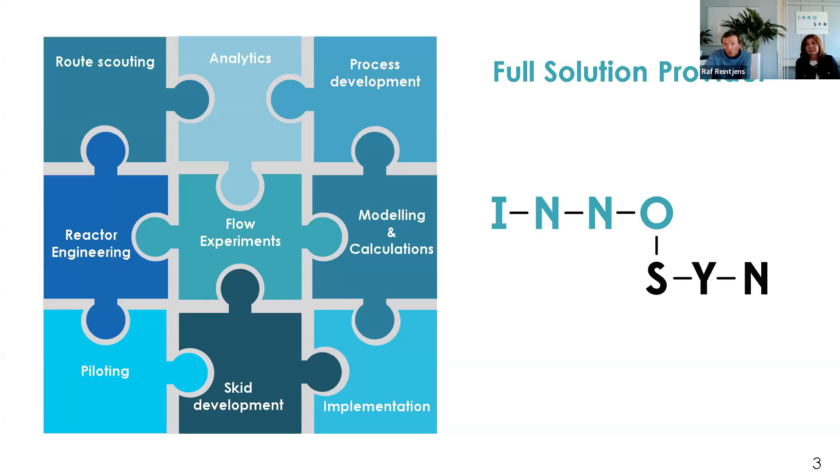Now, coming to the subject, ester reduction with DIBAL. Typically, you see these kinds of conversions being done in the fine chemical industry in a batch reactor. Now, the batch reactor is a very versatile type of equipment, but it also has a list of very familiar limitations, which you all know, of course. But I want to highlight the most important one, and that will be the limited cooling capacity. And that makes it extremely difficult to maintain temperature control during this reduction.

And typically in batch mode, this is done by slower dosing of your reagent, the DIBAL-H. So not the intrinsic kinetics determine the productivity of your system, but the dosing rate is telling you how fast you can produce. And this has to be slower than the cooling capacity of your reactor. Now, how can we better tackle that problem and gain high productivity?

Best thing so far is to switch from batch mode to a continuous mode. And there we have, of course, different reactor systems at hand. The most simple one would be a continuous stirred tank reactor. But in that case, we lose control over the time component. CSTRs have a very broad residence time distribution, and this is not what you would like. So moving down and gaining more control over time, we end up with tubular reactors as the ideal reactors for such a fast exothermic reaction.

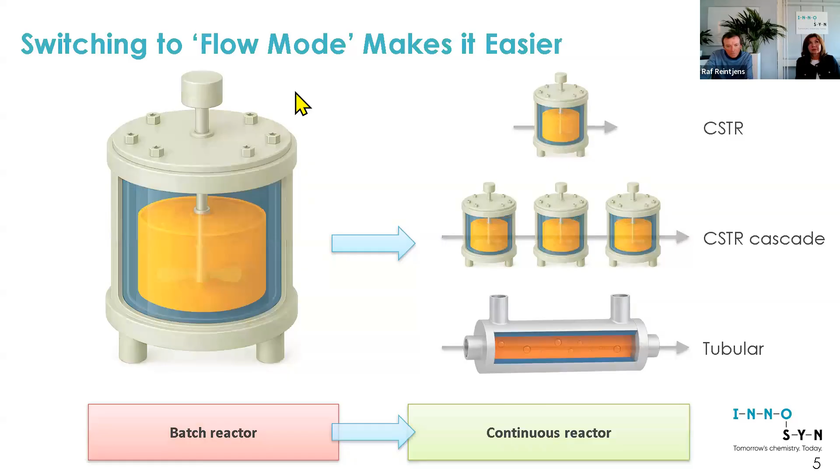Now, tubular reactors, and especially tubular flow reactors as we have designed, possess very advanced capabilities, which enable us to do these instant chemistries. And that comes from the fact that these tubular flow reactors with millimeter-sized channels provide us with enormous heating and cooling capacity and instant mixing. And that enables us to handle chemistries that produce unstable intermediates.

Next to that, these small-sized channels, we are talking 1 to 4 millimeter channel sizes with just 0.5 millimeter of wall thickness. Nevertheless the wall is very thin, they are extremely pressure resistant, which means that also high pressure reactions, high pressure process conditions can be handled. So, for instance, low boiling solvents can be handled at very high temperatures, way above the atmospheric boiling point of your solvent.

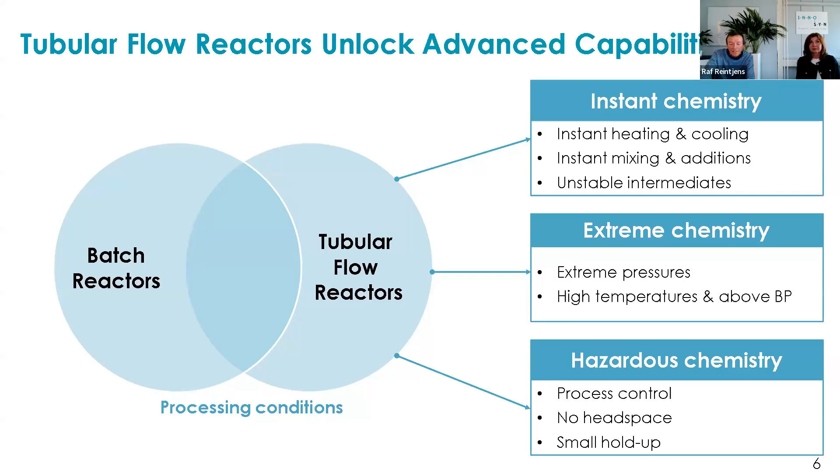And finally, the increased heating and cooling capacity gives you process control over the main parameters that are important. These channels will be fully filled, so there is no headspace available, and the high productivity will translate in a low processing volume, which in hazardous chemistry is, of course, essential when you are handling dangerous goods.

Here you have a number of examples of 3D printed flow reactors, small ones for the lab and larger ones for piloting. At InnoSyn, we opted for a modular design concept, modular in the sense that we will have different functionalities and different volumes and sizes, so that we can apply these modules and reconfigure them easily in the required reactor setups that we need in our lab and in our piloting investigations. And of course, later when such a reactor system needs to be scaled to your plant situation, then you get a dedicated designed and manufactured reactor.

Now, to be able to create all these excellent capabilities, we need to vary the configuration, the geometry of the channel, the size of the channel, so diameter and length, and shape of the channel. And for that, it was advantageous to use 3D metal printing as a new manufacturing technology, because 3D metal printing allows us to apply that design freedom that we require for that high performance.

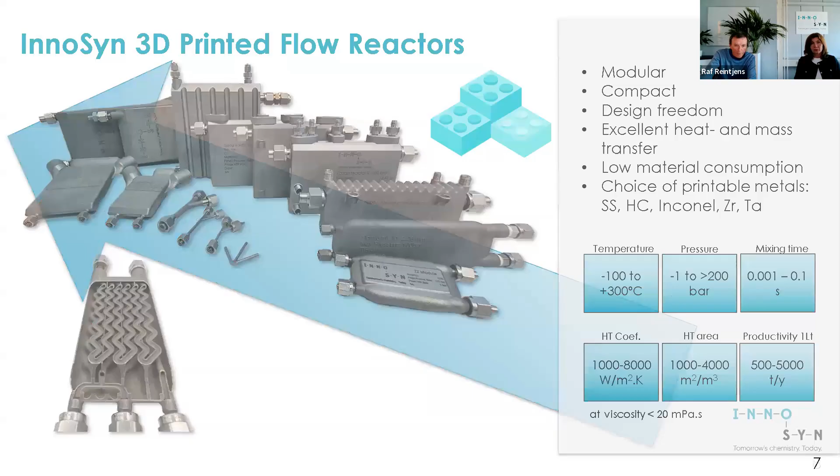Now, where does this high volumetric heat transfer capability come from? The volumetric heat transfer capability is calculated from the overall heat transfer coefficient in watts per square meter Kelvin, multiplied by the volumetric heat transfer area in square meters per cubic meter of reactor volume. Now, we investigated these parameters, and we started with, of course, the heat transfer coefficient, to get that a little bit higher, to improve it from the batch situation.

And therefore, we designed temperature and heat transfer flow cells to measure it. So in the bottom part here, you see my mouse, you see such a typical heat transfer flow cell. Here we have heat transfer fluid flowing through the main tube, and we have a part of reactor channel, in this case a zigzag channel of 1.13 millimeters diameter. We have the possibility to flow a certain processing fluid through that zigzag channel, while we can insert temperature probes at the beginning and at the end of this section.

So we can measure heat transfer coefficients over a short section, and then vary the turbulence at the processing side, while we also are able to vary the turbulence at the heat transfer side. And the wall thickness is, of course, in all these measurements the same. But since that is only 0.5 millimeter of metal, the high conductivity of metal results in a situation where this wall is not posing any resistance to heat transfer. Now, please give your attention to this graph here. On the vertical axis, we have the heat transfer coefficient on the processing side.

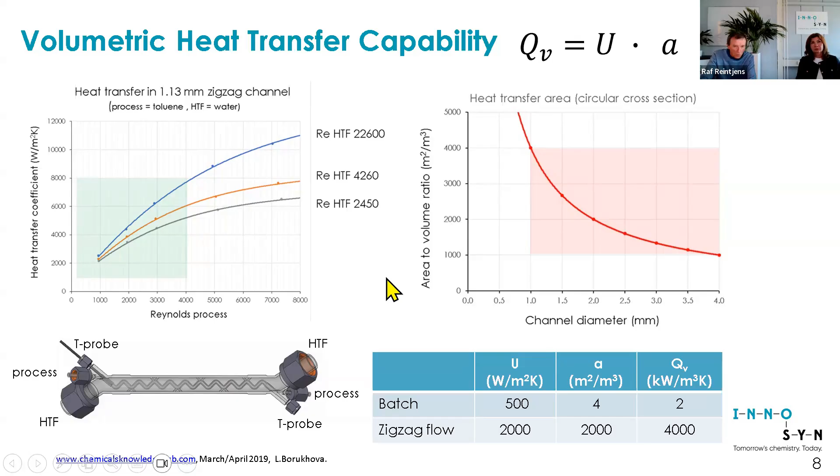Having a high heat transfer is one thing, but how to be sure and how to monitor that? Here comes a second feature stemming from the design freedom of our 3D metal printing. Although the channels have only a few millimeters in diameter, we are able to design our modules in such a way that we can insert small diameter temperature probes. You can see that here, that blue line is a small diameter temperature probe of between 1.5 and 0.5 millimeter, inserting directly into that channel. And we can have multiple of these inlets for probes in a lab scale reactor.

Here you see the scheme of that reactor. There's a process inlet and a process outlet, and while the fluids are flowing through or reacting, we can measure the actual temperature profile. And these larger inlets are there to allow the heat transfer fluid to flow through, and to achieve high Reynolds number, we have to have more space. So these channels are much wider than the reaction channel and have higher flow rates.

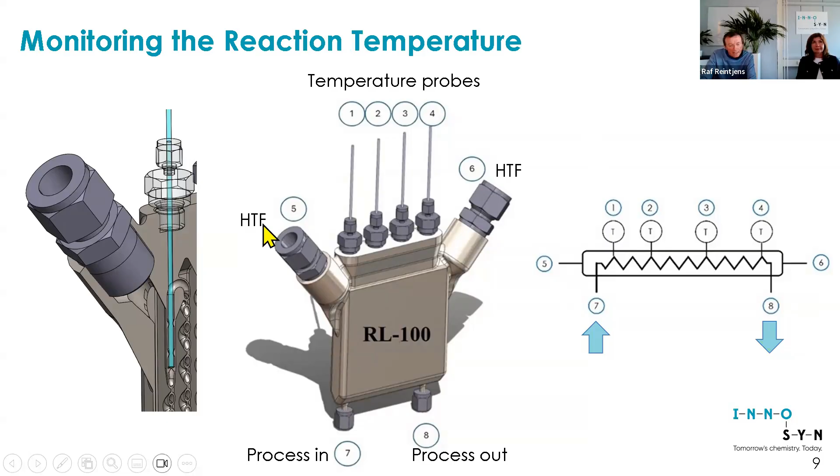Providing these high heat transfer capabilities is something that we tailor at lab scale. So the reactor design is tailored to the needs of your chemistry, meaning that the channel performance is optimized in the lab. Geometry, size, volume, residence time, all these aspects need to be optimized in the lab together with the processing conditions.

And then to allow a robust scale-up, we rather keep these parameters, size and geometry, the same, or at least close to that value, so that the actual increase of production capacity is coming from the fact that we pack multiple of these channels in parallel in a single reactor module. And if that doesn't provide the required production capacity, we can have multiple of these modules again in parallel, but then externally, to gain in capacity to your desired target capacity.

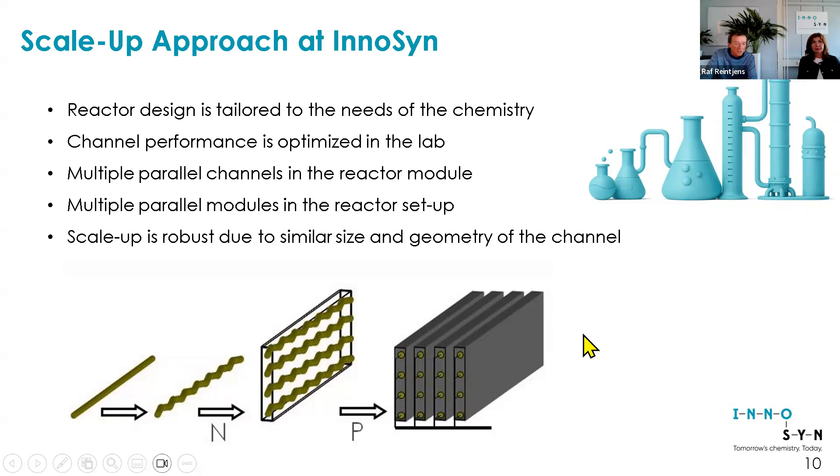So we are able to manufacture real plant scale flow reactors, but there is a second aspect to reckon with. When plant scale commercial flow reactors are to be used in a plant, they have to comply with legislation. The first thing that you then encounter is that we have to comply with the Pressure Equipment Directive put forward by the EU. And this tells us that when the volume of the reactor setup, the design pressure, the design temperature is above a certain value, you need to certify that your reactor is safe to be used.

This is a procedure which is well known for batch and large scale reactors, but for 3D metal printing as a new manufacturing technology and flow reactor as a new reactor system, this was not previously known or done or demonstrated. And I can tell here that we have done recently some customer projects where we provided commercial flow reactors, and together with a notified body and our 3D metal printing service provider, we went through the whole procedure to acquire that certification. And this typically means that you have to demonstrate to the notified body that your printing parameters are qualified to do so.

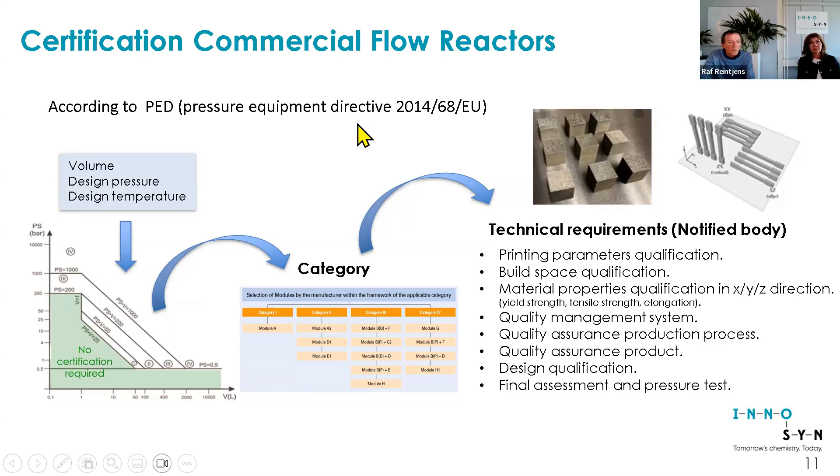And furthermore, the printing service provider, the company itself, has to show that their quality management system is of a certain level. Quality assurance of that production process has to be there. The product itself has to be looked at, meaning that you have to have a qualified design. And finally, we have to show that in a hydrostatic pressure test, we can meet all the requirements. Now, Innosyn proudly can announce that we have done this and we are able to provide it to you whenever you would require a commercial flow reactor from us.

Now, sorry for this a little bit long introduction. We can now move on to our actual case study, the reduction of an ester to an aldehyde with DIBAL-H. This reduction of ester is typically done in a two-step approach to avoid selectivity issues, meaning that you reduce the ester first to the alcohol and then oxidize again to the aldehyde. Now that is a laborious route, and therefore industry rather uses DIBAL as a reagent, because DIBAL allows you to partially reduce the ester to exactly the aldehyde that you need.

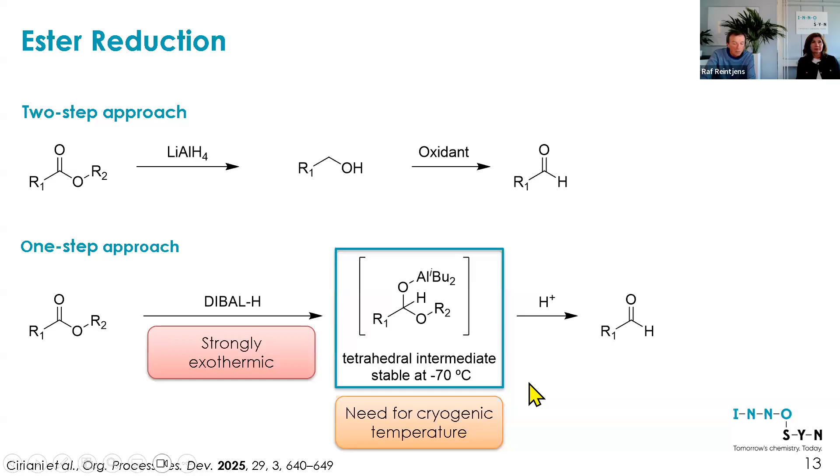The only downside of this is that this reduction is strongly exothermic. It's about -200 to -250 kilojoules per mole. And it goes through a tetrahedral intermediate, which is only stable at very low temperatures, say -70 degrees Celsius. When the conversion of the ester to the intermediate is completed, then you can quench the whole system with protons coming from either methanol or an aqueous acidic quench, and then the aldehyde is released. But during that whole process of DIBAL dosing, there is need for this cryogenic temperature to keep the tetrahedral intermediate stable.

Now, why is that so important? Here again, you see the mechanism depicted. The ester forms together with the DIBAL a tetrahedral intermediate, which is unstable. And it is very important that this intermediate doesn't degrade and release aldehyde prematurely. While you are conducting this DIBAL dosing and this conversion to the intermediate, any formed aldehyde would immediately yield loss of selectivity due to overreduction and alcohol formation. Here you see that depicted in the second part of the mechanism. The aldehyde, just like the ester, would also form an intermediate which after quench would be transformed to alcohol. So it's very important that we keep that tetrahedral intermediate very stable.

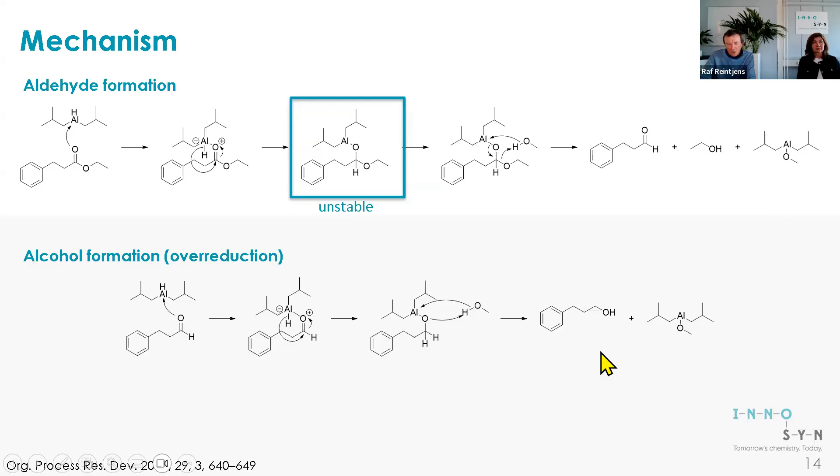Now, this then poses problems when using batch reactors for this conversion. Batch reactors have a limited cooling capacity. In the lab, there is still quite some area to volume present. But when we scale it up from, say, a 100 milliliter reactor to a 100 liter reactor, this area to volume ratio declines strongly. This will lead to further decline of cooling capacity, and means that the dosing of the DIBAL has to be even slower than it was in the lab to maintain the cryogenic conditions. And during all the dosing time, your tetrahedral intermediate needs to be kept stable. That reduces the DIBAL dosing flow to maintain temperature control, and low dosing flow immediately translates into long exposure of that unstable intermediate.

We apologize. We had a small technical issue. We lost our connection. So we're back on track, and Raf will continue.

Okay. So here are a few lab scale examples of batch reductions with DIBAL. And you can see that they kept temperatures at -78 degrees Celsius and had dosing times of half an hour to 1 hour to get all the reaction heat out while maintaining that temperature.

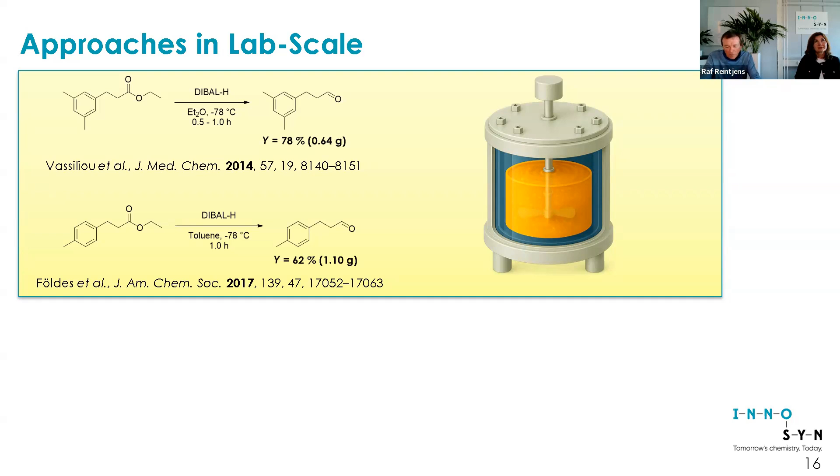Now, selectivities are not that great; you lose a lot of yield towards alcohol formation. And the way to improve that, of course, as we pointed out earlier, is to switch to continuous mode.

And here is an example of lab scale DIBAL reduction in a small flow reactor. You can immediately see that the 1 hour dosing time that the batch reactor had is reduced to even less than 1 second here in this example from MIT in 2012. The yield is 96%. There was almost no alcohol formation, but that stems from the fact that the conversion was not complete. The example had about 96% conversion.

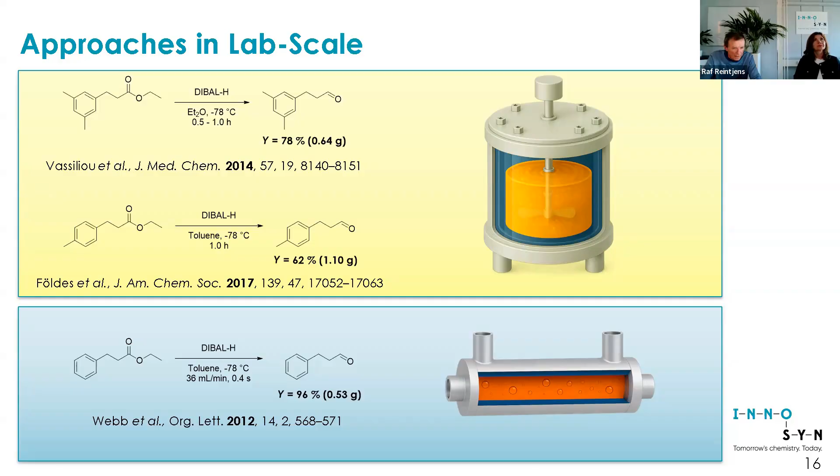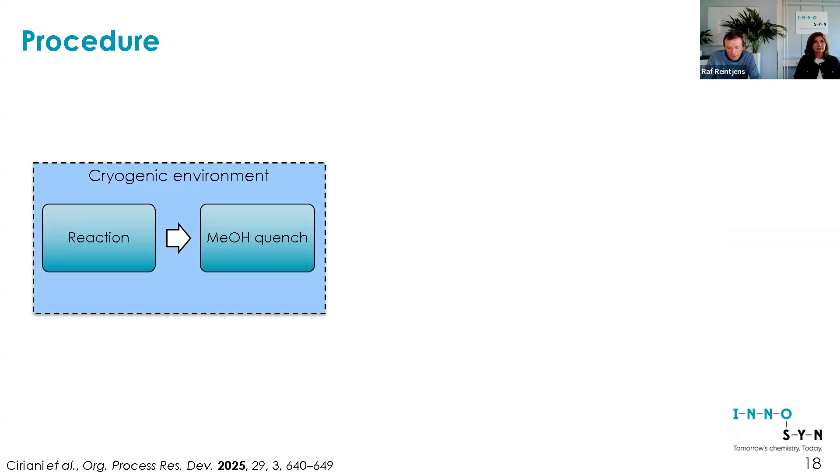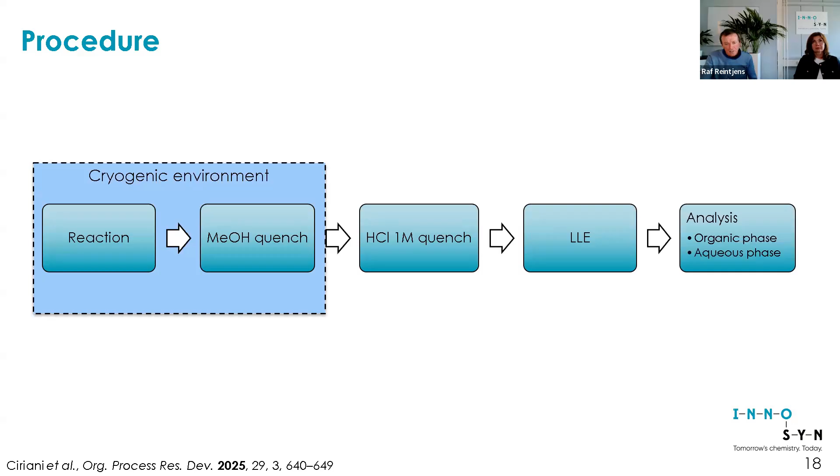Now, let's move on to our lab scale investigations. Here we have the procedure that we followed. The DIBAL reduction and the methanol quench are, of course, executed in a cryogenic environment at low temperature, then followed by an aqueous quench with acid, a liquid-liquid extraction to separate the product and catch it in the organic phase, and finally, full analysis of both the organic phase and the aqueous phase.

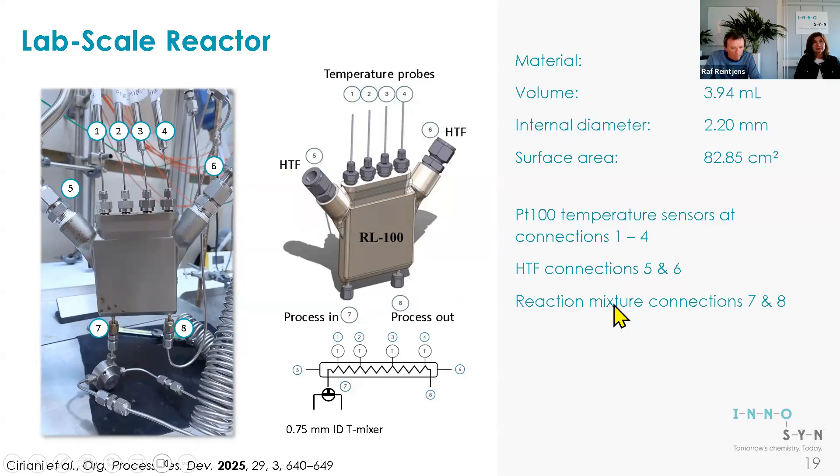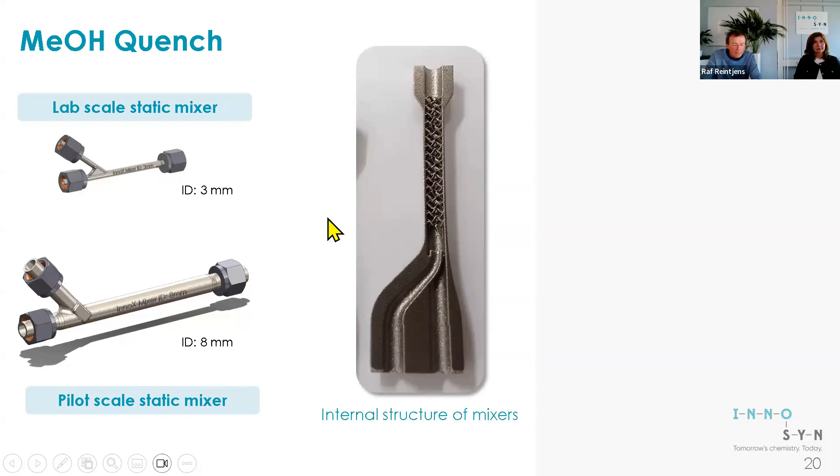After this production of the tetrahedral intermediate follows the methanol quench, and on lab scale we used a static mixer for that with a small diameter, only 3 millimeters. Pilot scale used a bigger one of 8 millimeters, and 3D metal printing comes to aid here, because the internal structures of such a mixer have to be very intricate, and that is only possible with 3D metal printing in a 3 millimeter channel.

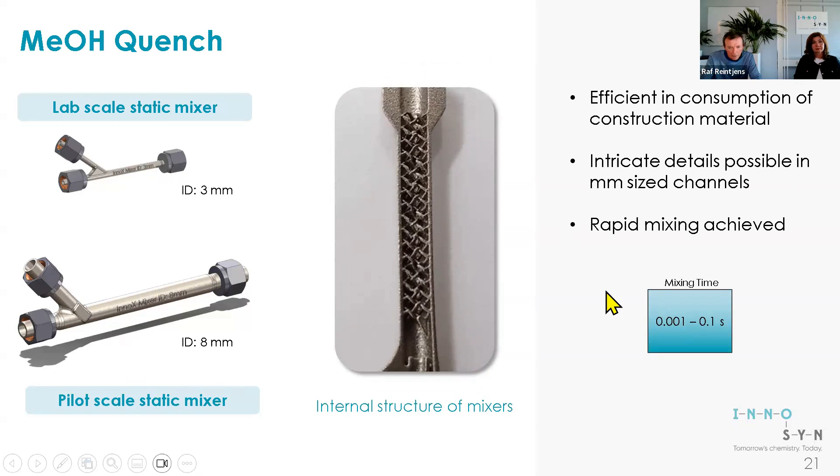Here we have the full setup that we used in the lab as a process flow diagram. Of course, it looks very complicated. I will try to explain a bit more what we see here. First of all, there are a number of gear pumps required for all the reagent flows that we need. Gear pumps are chosen because they have very pulsation-free flow. And to measure that, we applied mass flow controllers. These mass flow controllers directly set the flow rates for these gear pumps. So there is a flow control system for every reagent flow that is required.

Then there is extensive use of cryostats. We had to use 3 cryostats in the lab because there was a large amount of heat to be removed. First of all, the pre-cooling of the reagent flows to a very low temperature. Then, of course, in the reactive system, we have the reactive heat that needs to be removed.

Now, we used in our experimentation 25 mass% DIBAL in toluene, which we could dilute further to the required concentrations by adding dry toluene at this mixing point, after which the desired concentration would flow towards the reactor. On the bottom side, you have the dosing system for the ester and the methanol for the methanol quench. Again, the pumps and the flow control systems, and the mixing of the ester and the DIBAL happens at the reactor site. Methanol is then added at the static mixer just after the reactor.

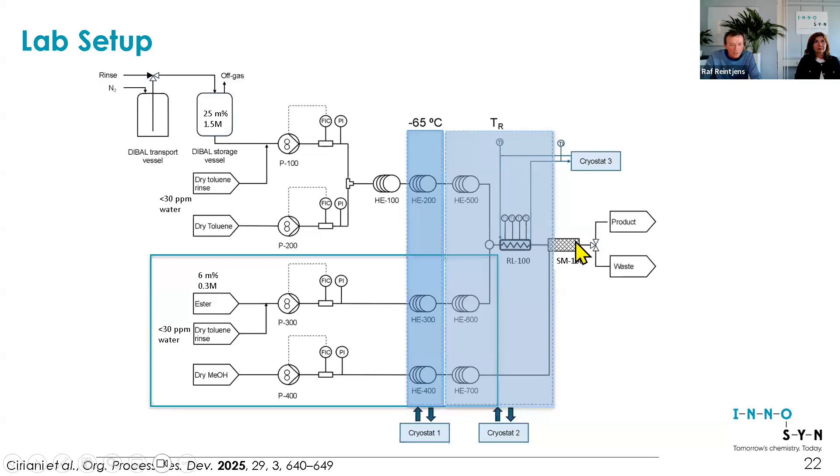Okay. What were our results? We were able to vary residence times in the range of 1.2 to 1.9 seconds, the DIBAL equivalents in the range of 1.1 to 1.4. You need a small excess of DIBAL, but you don't want too large an excess, otherwise you risk over-reduction in the methanol quench. Temperatures were varied from -40 to -55 degrees Celsius, a little bit higher than in the lab publications. And with that, we achieved partial reduction of the ethyl hydrocinnamate substrate.

Production capacity ranged from 0.16 to 0.22 kilos per hour, which is already quite significant if you imagine that the reactor has only 4 milliliters of volume. Now here are the results: temperature, residence time, DIBAL equivalents. We saw no clogging anywhere during this experimentation, which could occur when you have some moisture in the system and the DIBAL produces alumina salts. So dry operation was secured and provided us with no clogging.

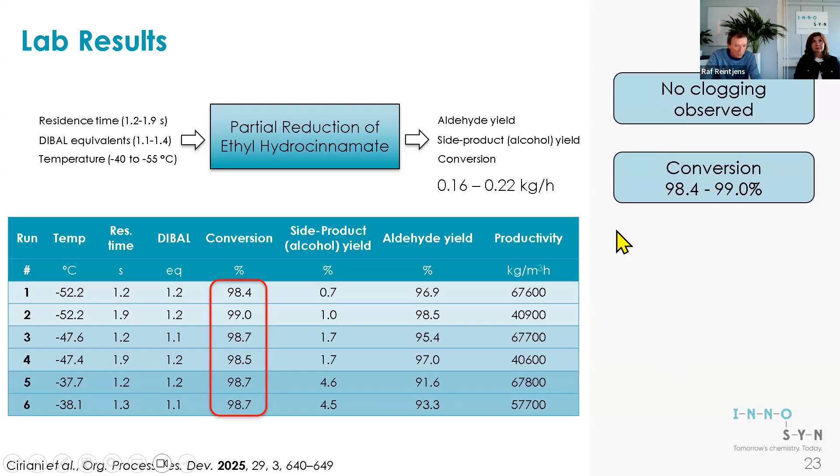Conversion was very high, in the range of 98 to 99%. So only a very small amount of ester was left after the DIBAL addition. Then when we look at the

selectivity that we could achieve, the alcohol formation that we have witnessed, we saw that the temperature of the reactor is a key parameter. At the very low temperatures of -52 degrees, we achieved little alcohol yield, and the higher the temperature was, the more of this alcohol over-reduction was visible. And of course, that directly is related to the stability of that intermediate.

Best results were then achieved at the lowest temperature, -52, and a significant yield of, say, on average 97%, with just 1% of alcohol over-reduction was our final result. Now,

when we look to the data that we measured, we see here the temperature profiles that we determined while we were running this synthesis. You have to imagine the reactor is at a steady state, so at the various positions of these temperature probes, you will find steady measurement of temperature. The inlet temperature is depicted on the vertical axis, -52, here it is 47, and here it is 38. So what can we see here?

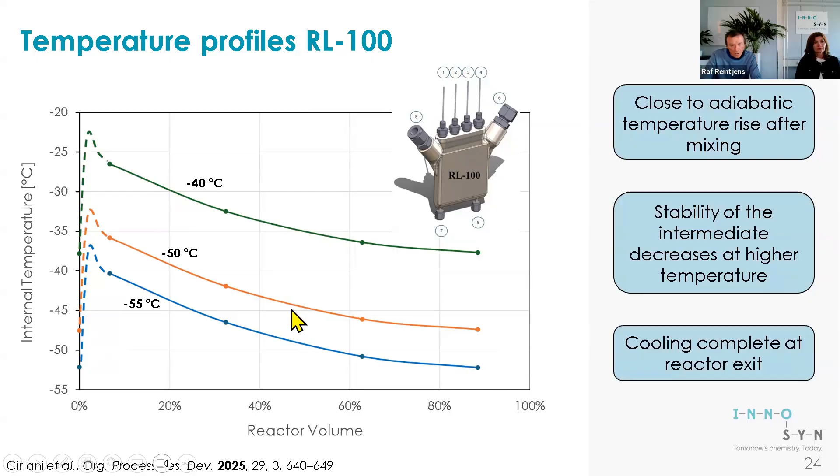There is a box, cold box we call it, around the individual heat exchangers and reactors. I will show that in the next slide. The box itself is flushed with dry nitrogen to avoid any condensation of moisture or ice on your reactor module, so that you still are able to quickly change to other modules if necessary. The samples that we produced are, of course, far bigger than we did on lab scale. Here we have about 1 liter bottles of sample.

The pilot setup, the process flow diagram, looks quite similar to what we had in the lab, but is of course of a much larger size. In this case, we applied stainless steel reactor and heat exchanger modules; there is no corrosion issue, but these modules were better available at that moment, and the heat conductivity of stainless steel and Hastelloy are practically identical. They deviate a little, but the heat conductivity of the wall doesn't pose any limitation to the heat transfer capability.

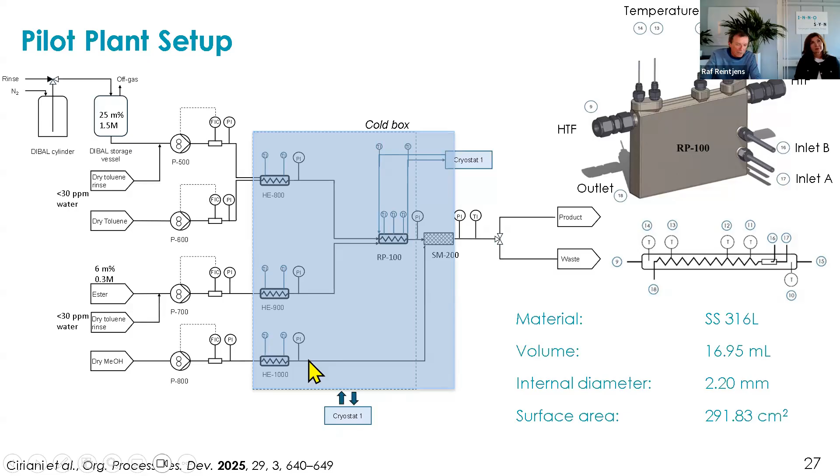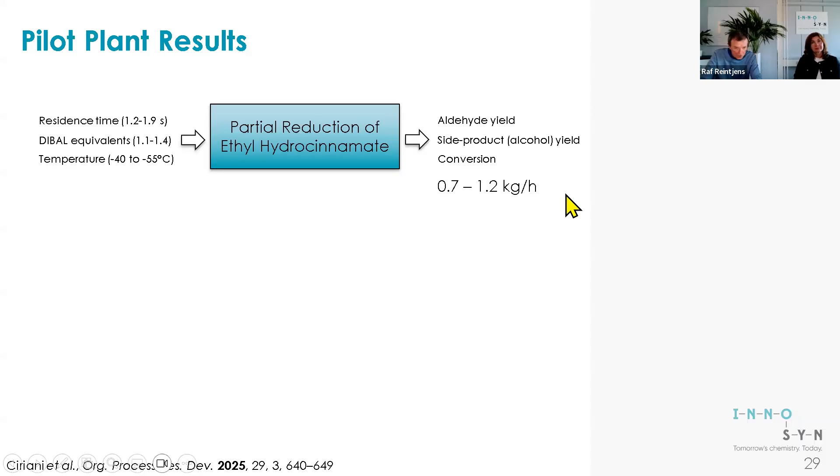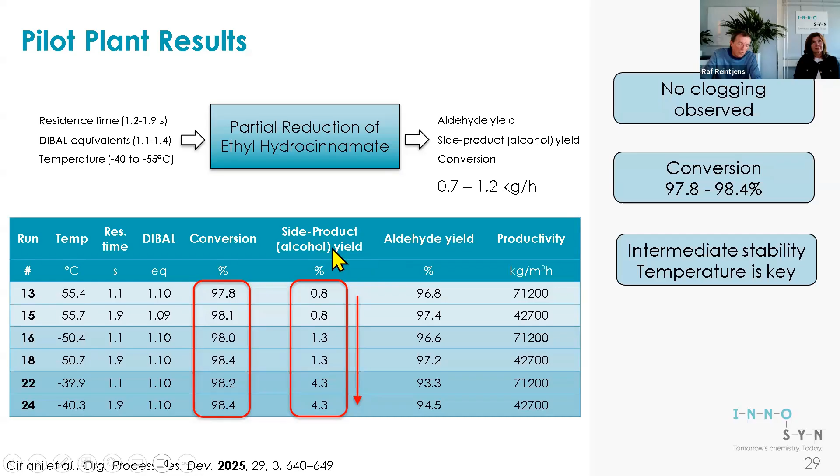Again, we applied similar ranges of variations in residence time, DIBAL equivalents, and temperature. We achieved a way higher production capacity, and these are our results. Again, there was no clogging observed. High conversions achieved, about 98% conversion, a little lower than what we had in the lab, but we could duplicate the side product formation, the alcohol over-reduction formation, quite nicely.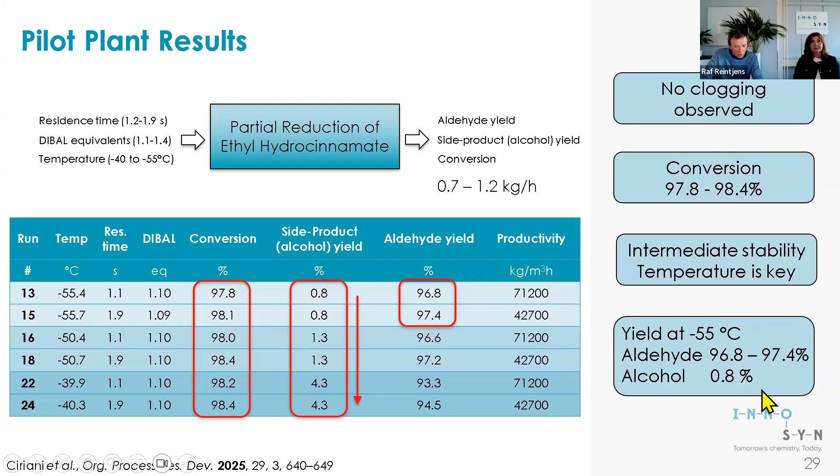As you can see, at lower temperatures, we had less than 1%, 0.8% of alcohol, and the higher the reaction temperature goes, the more alcohol is produced. Again, directly translated and correlated to the stability of that tetrahedral intermediate. The best result that we could achieve was at the lowest temperature of -55. And the yield in aldehyde, 97%, and alcohol fits nicely with the lab results.

Again, also in the pilot reactor, we have these temperature probes. In this example, we had a reactor with only 3 temperature probe inserts, but the picture really resembles what we had in the lab. A fast exotherm and adiabatic temperature jump in the beginning, and then a similar cooling curve as in the lab.

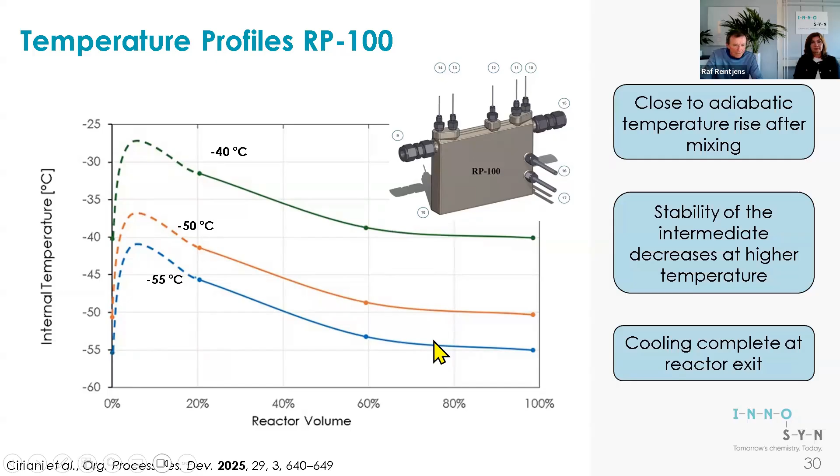This high temperature, adiabatic temperature jump in the beginning, is actually posing a problem. It exposes our tetrahedral intermediate to a much higher temperature, and that causes this 0.8% of alcohol over-reduction. And we think that a single injection point, as we applied it here, is hampering us.

We expect that multiple DIBAL injections, so multiple dosing points, would be an improvement. Because after every dosing point, it's possible to cool back to the original temperature. And by spreading the release of the total reaction heat over multiple points, we guess that we can achieve, on average, a lower temperature and therefore a better result in the alcohol over-reduction.

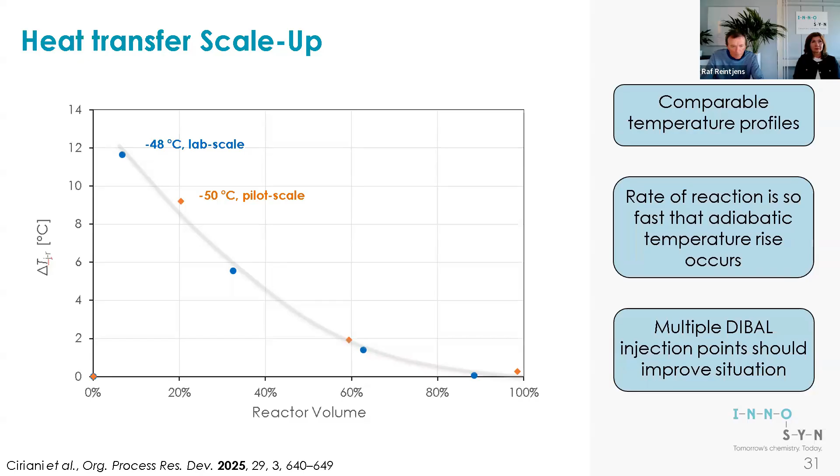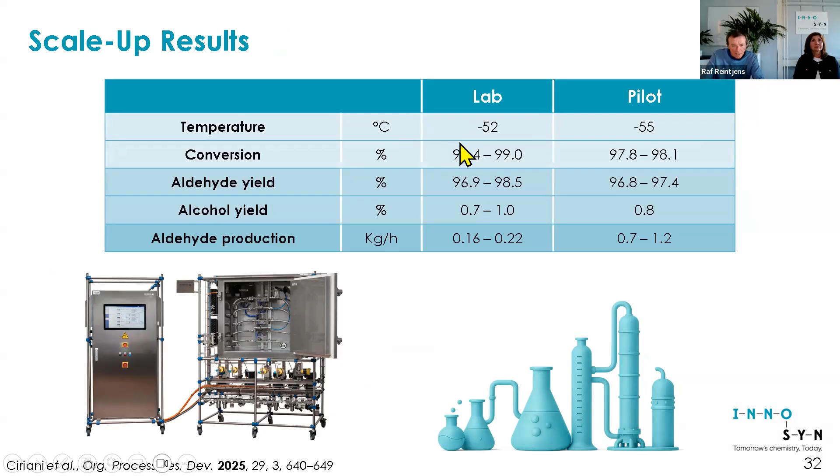Then finally, I would like to summarize the best results that we could achieve in the lab and in pilot. I think the table speaks for itself, and it is a nice representation of a successful scale-up of this very challenging chemistry. DIBAL reductions of esters can have high yields and low over-reduction, combined with high productivity, 40,000 to 70,000 kilos per cubic meter hour. Temperature is the most important factor to be controlled to avoid over-reductions.

3D printed flow reactors provide excellent heat transfer capability, as you have seen, and the reactor performance was successfully scaled from lab to pilot.

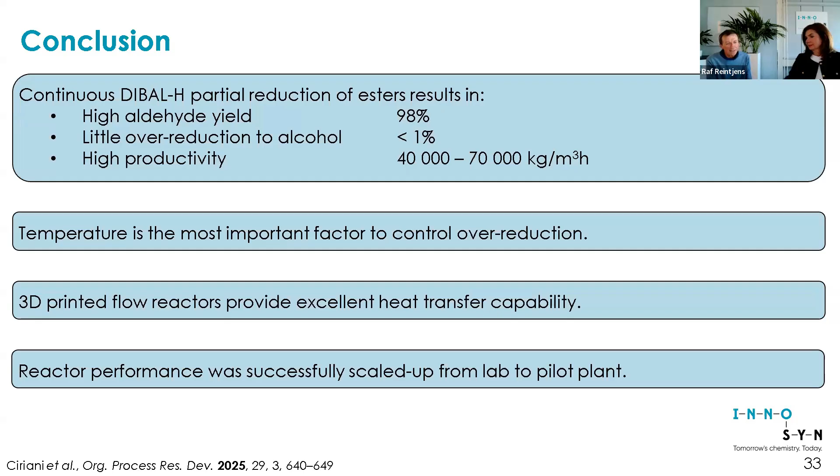What was the time needed to go from the lab to the pilot plant? How much time it took us to go? Okay, that depends. Of course, it will take time to design your piloting reactors, to prepare the 3D printing company to print the piloting reactors. It depends on the complexity of the chemistry. And in normal, typical cases, I would say that there'll be something between 4 to 6 months. But don't pin me down, because it depends on how complex is the chemistry that the customer will bring us.

Yeah. It will always depend on the complexity and the time and how much we need to invest. Yes, but still, I think that 4 to 6 months is still a very fast trajectory from having optimized your lab situation to running in a pilot plant at a way higher capacity. Yeah. The next one is also related to the MIT paper.

Why did the MIT people achieve 0% alcohol and InnoSyn still has about 1%? Can we explain that? Yes. Like I said in the previous answer, when you start at lower temperatures, -78, and you have a more dilute system, the kinetics will be as fast or close to, and the temperature jump will be less pronounced.

Therefore, you will not enter the domain of -30, -40 degrees Celsius, where the residence time and the exposure to that temperature will attack the tetrahedral intermediate and release prematurely the aldehyde. So if you do not touch that intermediate and you leave it intact, you will see very little over reduction. But again, the price to be paid is deep cooling, dilution of your system, and therefore loss of productivity. How that translates into process economics has to be seen with every individual project.